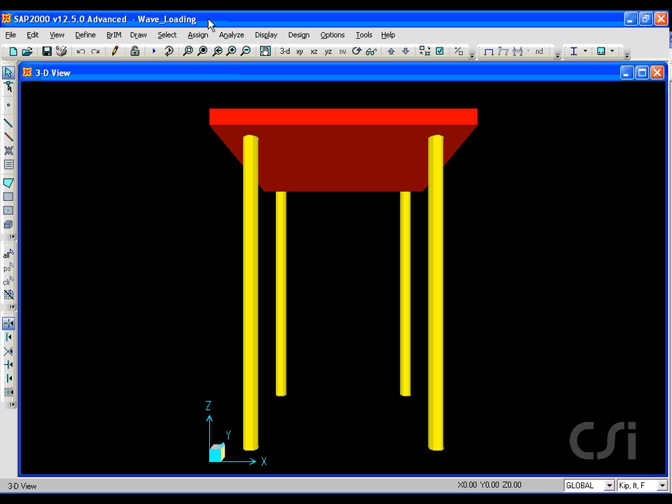This brief tutorial will show the tools that are available for generating wave loadings within SAP2000. For this example, we will assume that we wish to generate wave loadings on a structure that is submerged in 60 feet of water. The velocities and accelerations calculated in the fluid will be resolved into drag and inertial forces that will ultimately be applied as varying distributed loads on the members.

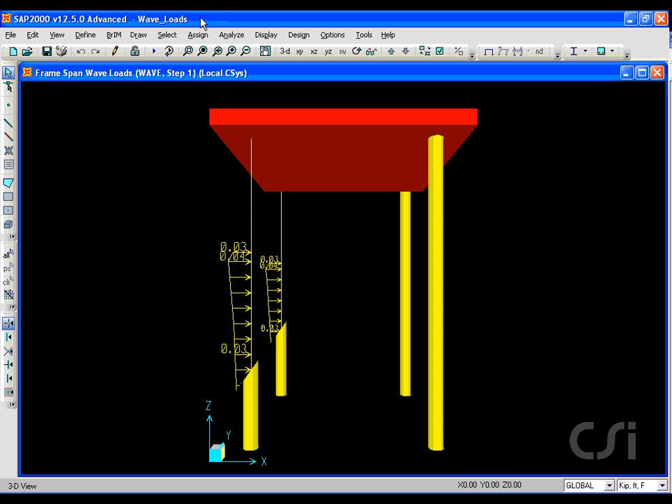The definition of the wave loads is handled through the Define Load Patterns option. We will define a new load pattern named wave with a type of wave, and with the automated lateral load based on the API specifications. Next, we select the wave case and go to the Modify Lateral Load pattern.

Here we specify the wave load parameters, such as the wave characteristics, current profile, marine growth, which affects the width of the members, drag and inertia coefficients, which when used with velocities and accelerations generate forces on the members, and wind load, which can apply wind loads to the non-submerged portion of the structure.

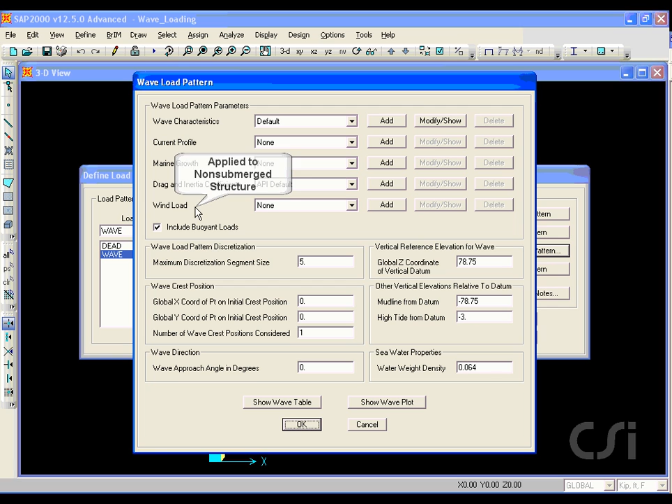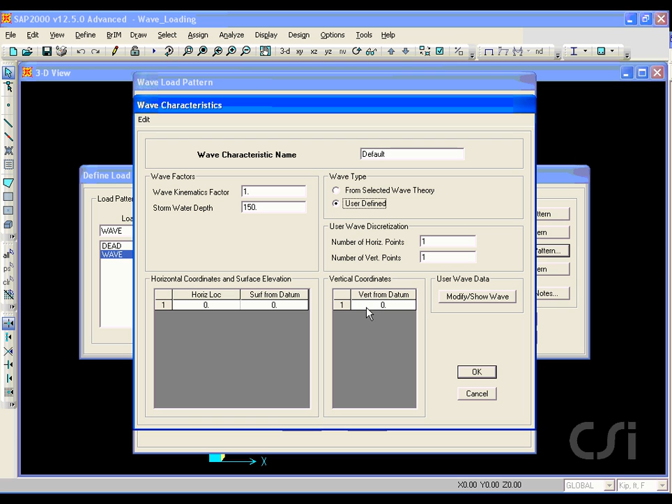Click on the Modify/Show button for the characteristics, and we see that under the wave type we have two options, wave theory or user-defined. If user-defined is selected, the user creates a table of wave points. For this example, we select wave theory and will generate a wave using the Airy wave theory.

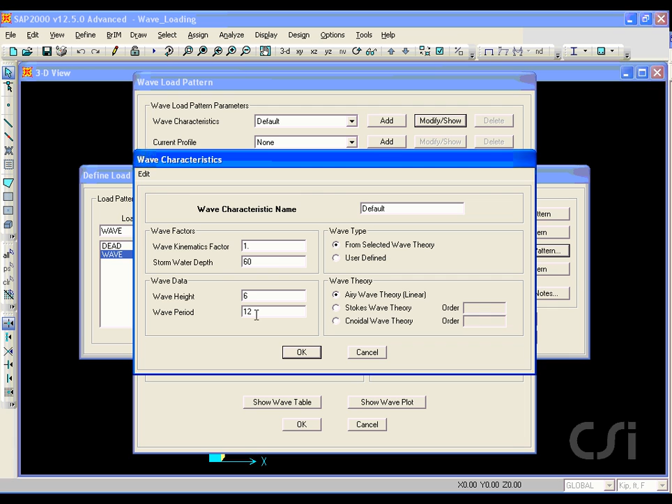We will leave the wave kinematics factor, which accounts for direction spreading, set to 1, but we'll set the storm water depth to 60 feet. The wave height will be set to 6 feet and the period left at 12 seconds. Click OK, and we can finish the data input by reviewing the position and direction of the wave, including the approach angle. For this model, we will consider only one wave crest.

In this case, under the vertical elevations, the datum should be a positive 60 feet, and the mudline will be minus 60 feet below the datum. We will set the high tide to be 0 from datum. We can view the wave by clicking on the Show Wave Plot button. Note that the program has calculated the wavelength from the input data.

On the plot, we have a number of items that may be displayed. The Click for Values option allows us to click anywhere on the plot to obtain the coordinates, as well as the velocities, the accelerations, and the pressure. The Contours option displays the velocity, acceleration, and pressure contours.

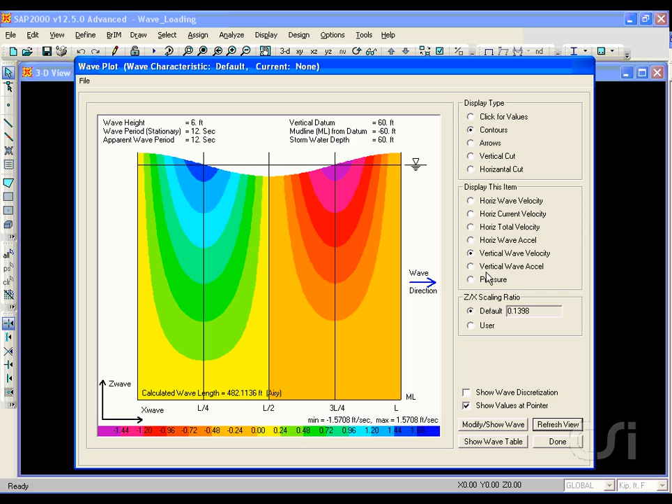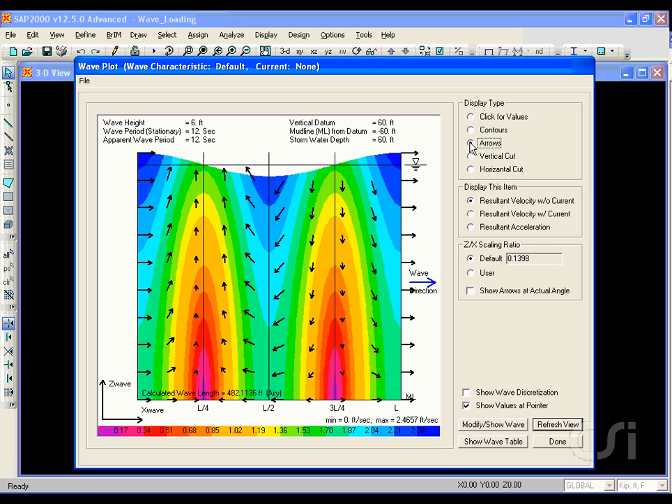The arrow selection displays the resultant velocities and accelerations, while the vertical and horizontal cuts will draw a diagram of the selected item at any location on the plot.

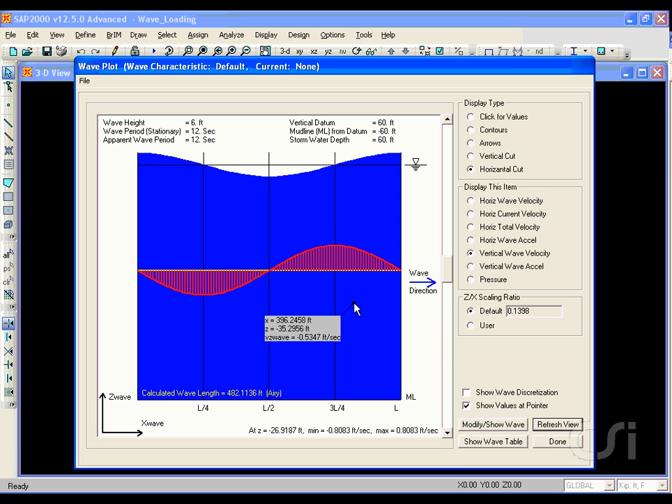If the Show Values at Pointer option is checked, the cursor will continuously display the coordinates and the value of the selected item, which in this case is vertical velocity. A click on the Done and then the OK buttons completes the wave loading pattern for this example.